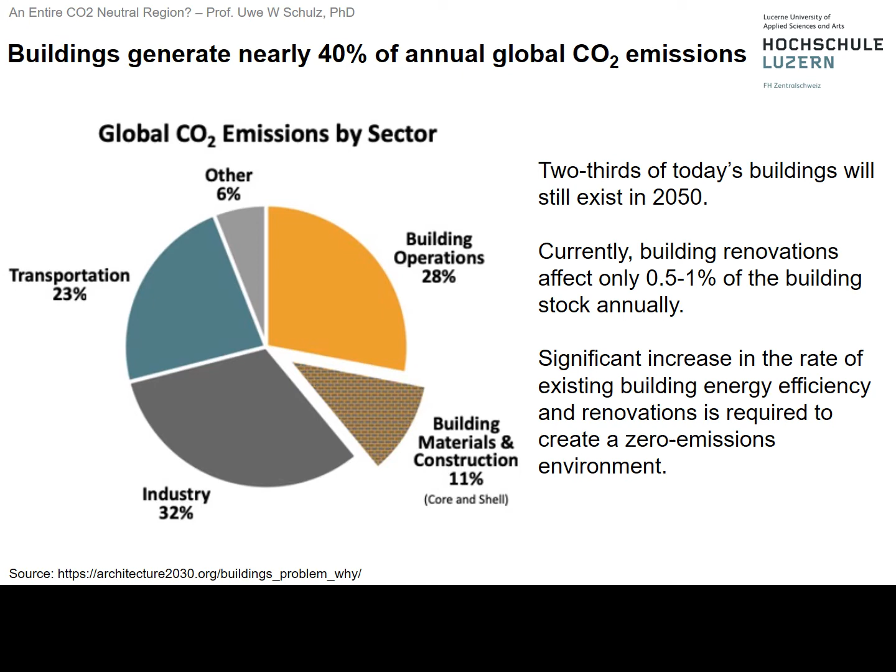Looking at specific Swiss buildings, today we in Switzerland are importing roughly 325 petajoule annually, just for the Swiss building stock. We do already have 71 petajoule per year of renewable energy, and the two together lead to 25 million tons of CO2 emissions. Our objective is to have CO2 reductions by a factor of 3,

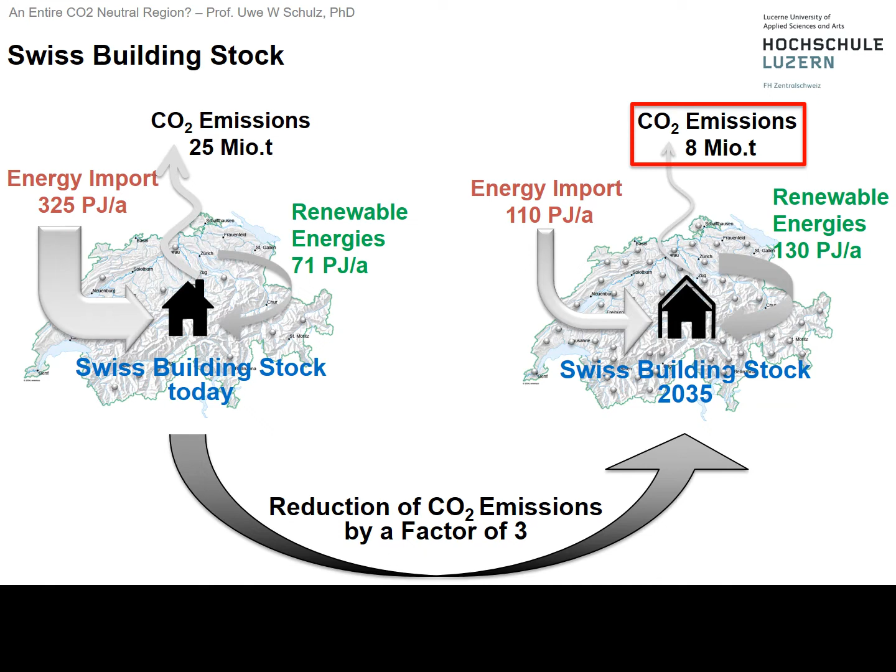which would then mean the energy import is being reduced to 110, while the renewable energy portion is increased to 130, then generating CO2 emissions of only 8 million tons, which is only about a third of what's happening today. Therefore, we are addressing existing buildings in a two-step approach.

First, reducing the energy demand, which can be accomplished by renovating buildings and respectively the envelopes, keeping the warmth inside the building, while for new buildings we apply higher standards. For the use of energy, we are more conscious and change and adapt the processes. One example is the simple fact of boiling water.

Boiling water in a pan requires 3 times as much energy as boiling water in a tea kettle, just as one of the examples where the effect of water boiling is identical, just the use of energy has been reduced to 1/3. Whatever is left as a requirement for energy is to be done in an efficient way, applying new technology and

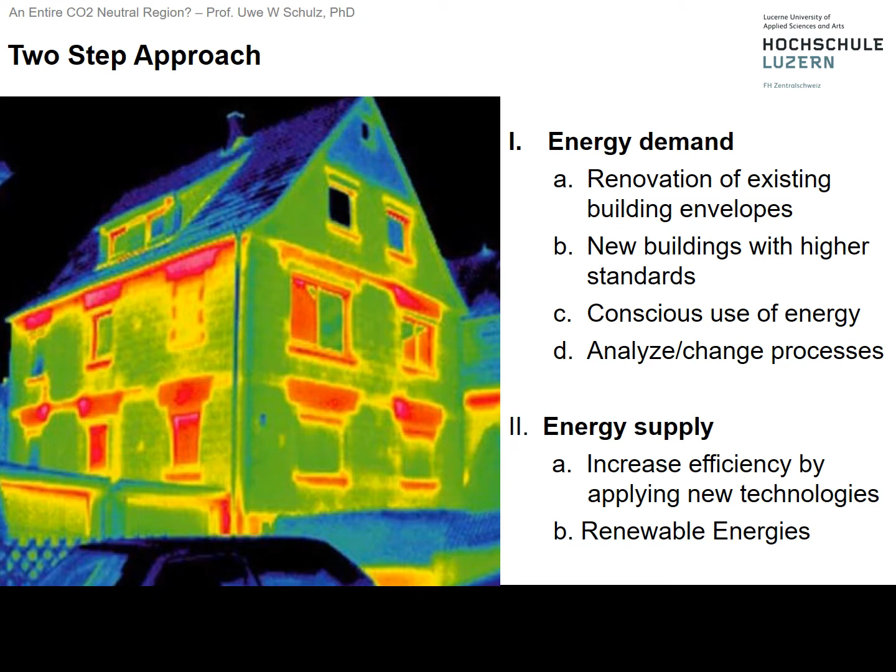building on renewable energy. Looking at the energy demand of Swiss residences, we can see that 2/3 is required for space heating. Obviously, this is partially because of the low winter temperatures, but in addition to that, we require almost 15% for heating of hot water, and then another 1.8% for heating, ventilation, air conditioning, making together the majority of the energy requirement in Swiss residences.

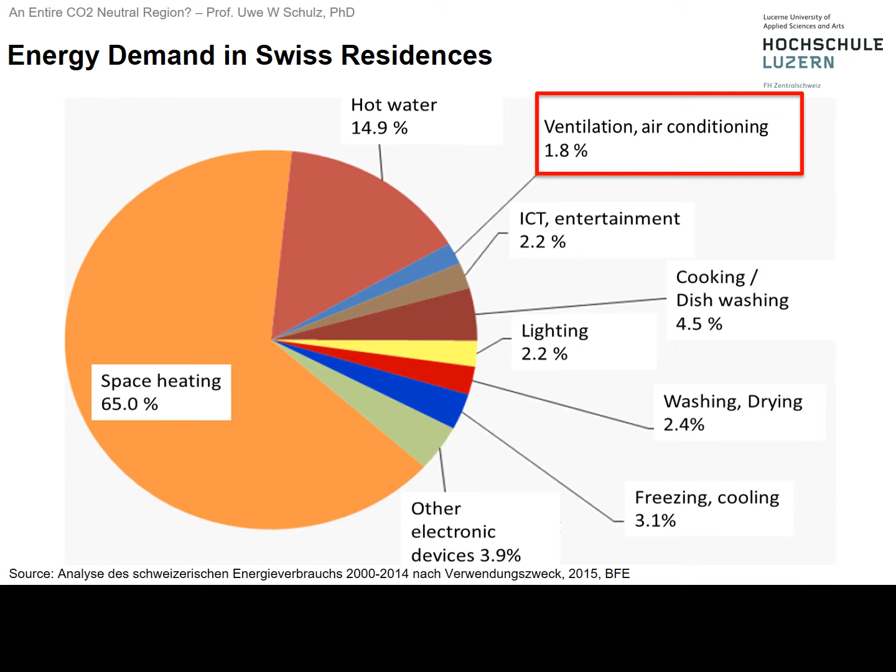A perfect way to reduce the energy demand of buildings and reduce the space heating requirement is to do an insulation, so a packaging of the building. Now, given that the buildings in Zernez are very pretty and therefore Homeland protected, one cannot do an insulation from the outside. So therefore, it needs to be done from the inside, as can be seen on the right-hand side, to have a similar effect.

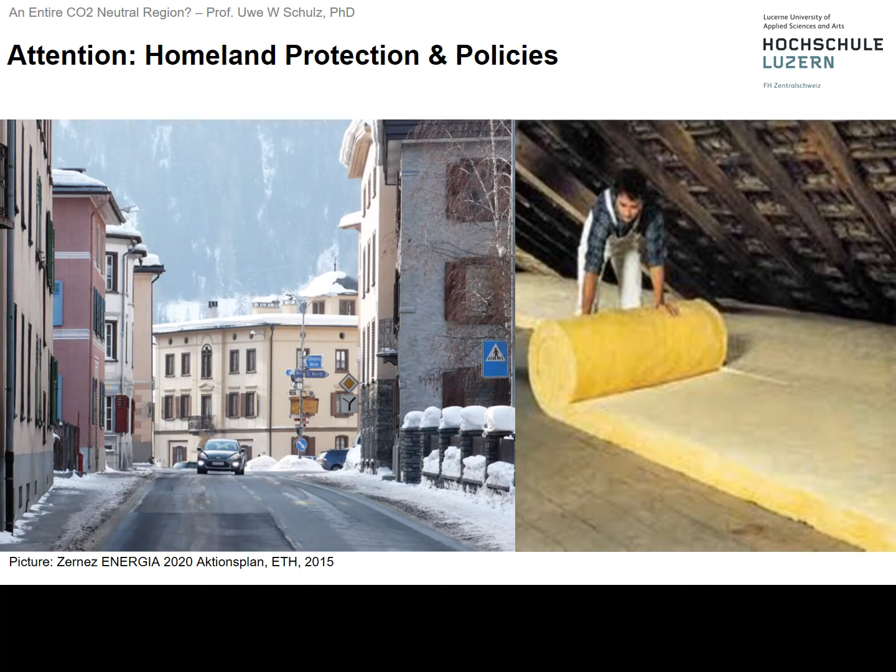While not as efficient, it may take a little more material, but it satisfies both the energy requirement and the homeland protection and policies. So moving to the energy supply, one technology everyone has been talking about is wind power. Now, wind power not only requires certain winds, but it also requires the acceptance of the inhabitants, which in the case of Zernez is not an option. So therefore, wind power is not part of this simulation.

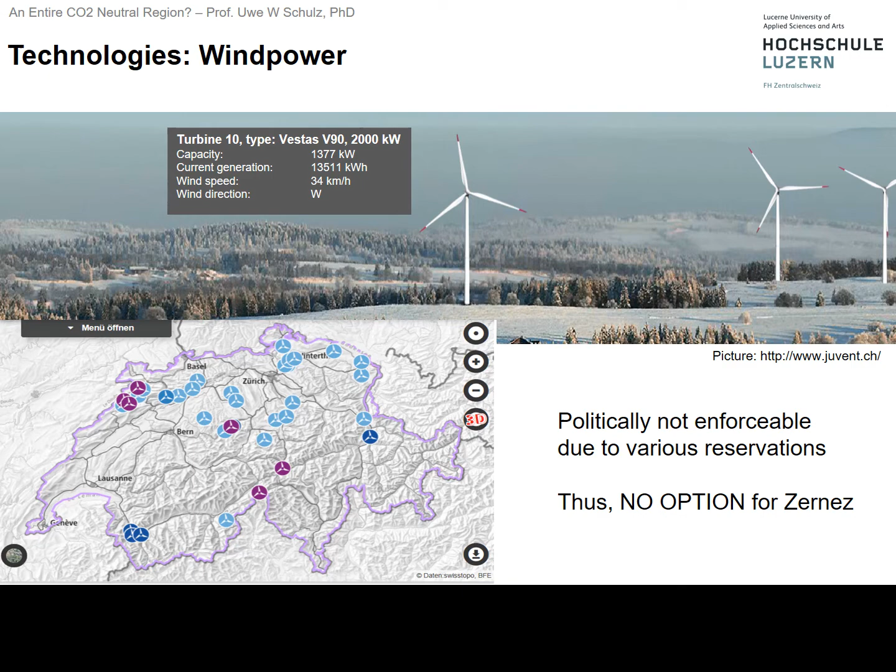Solar energy is the most obvious source of renewable energy. The sun is shining around the world more or less intensely. Looking at selected areas like the UAE on the lower left-hand side, we can see that the horizontal irradiation reaches levels of 2,500 kilowatt hours per square meter. In Switzerland, just like in Japan, the level is around 1300 to 1400 kilowatt hours per square meter and year.

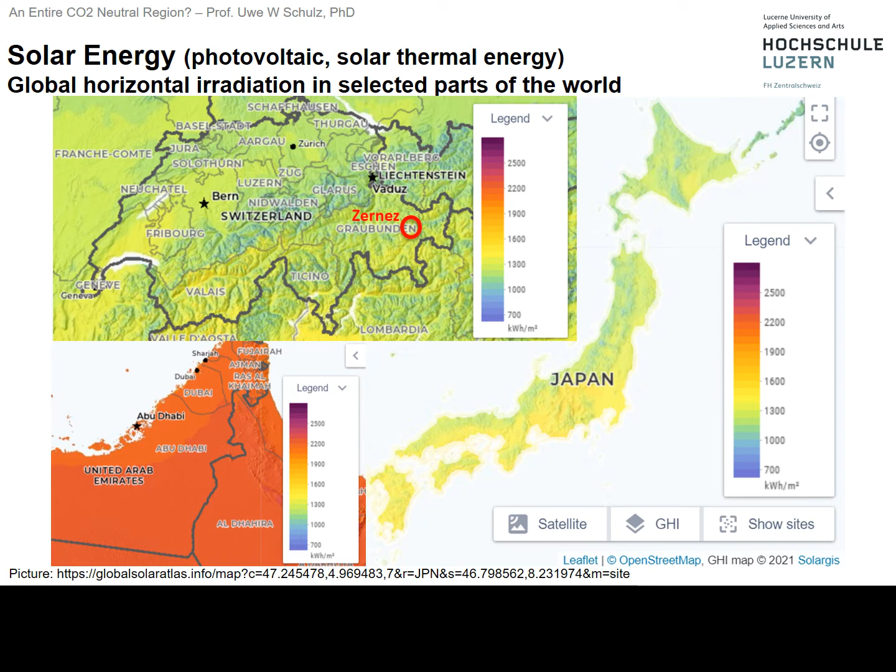One effective way to heat a building is using and applying heat pump technology. Heat pumps work like refrigerators. They cool one side and heat another side. So like in the refrigerator, we all know that when we touch the back of it, we have a heat exchanger which is warm. So this concept is being applied to buildings whereby heat is extracted from the ground or any other source of low temperature heat.

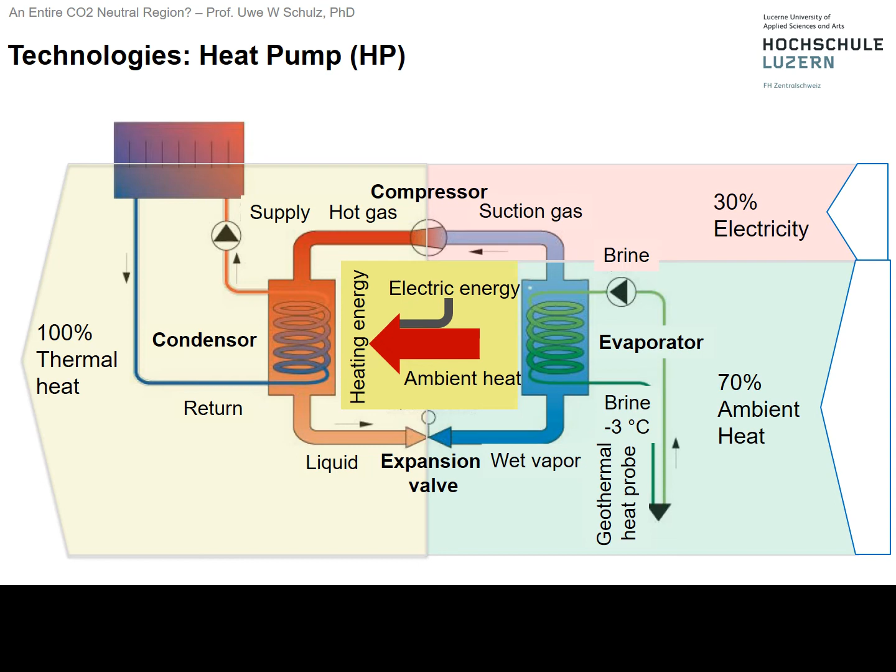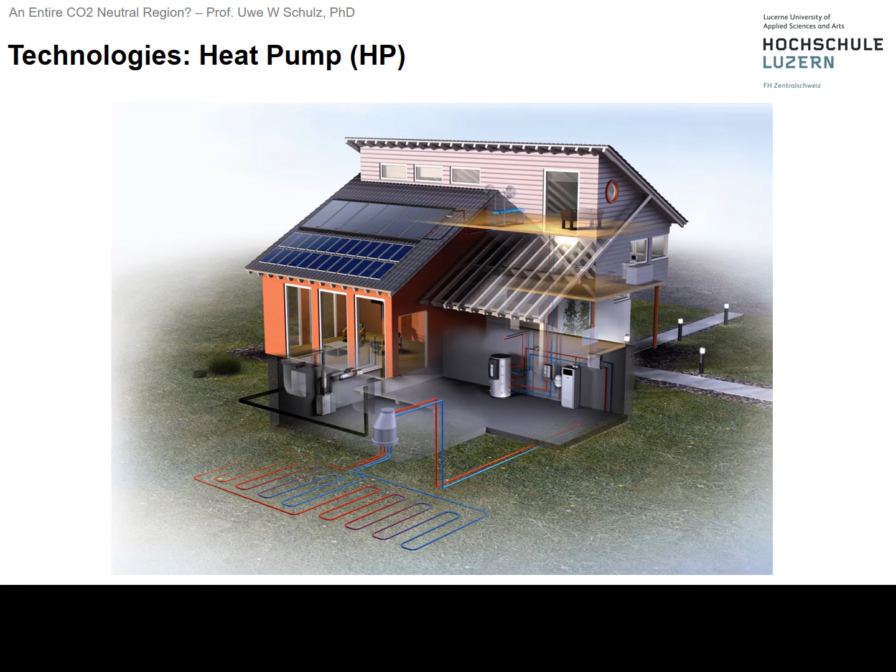Then compressor electricity is being added, and then the heat is pumped, as the name says, to a higher temperature level and then supplied to the building, which in case of the refrigerator is the backside of it. In this graph we can see how the heat exchanger is being put into the ground to absorb heat, and then how it is distributed through the building for heating purposes and hot water.

Now, here we see the challenge. We can have photovoltaic on the roof, maybe even a windmill somewhere. We need to worry about hot water, and all inside the building, where we know that it's a challenge to only use heat when the sun is shining. If we could pool multiple buildings together, we have a better chance to avoid simultaneous requirements.

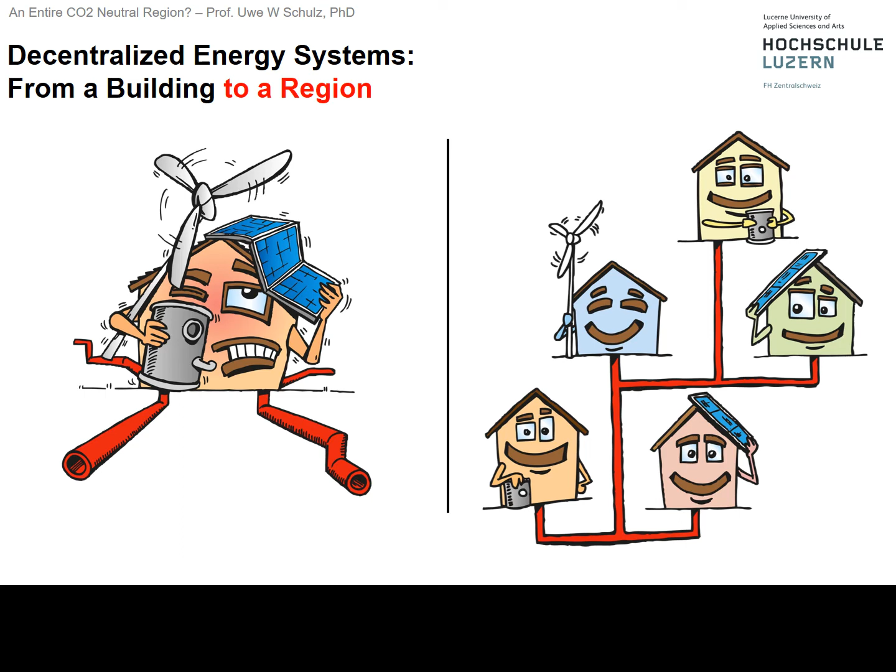For example, it is unlikely that everybody is taking a shower exactly at the same time or making dinner or lunch at the same time, while then maybe energy storage can be a good option and is therefore favoring a decentralized energy system. The district heating system includes a biomass wood chip heating plant.

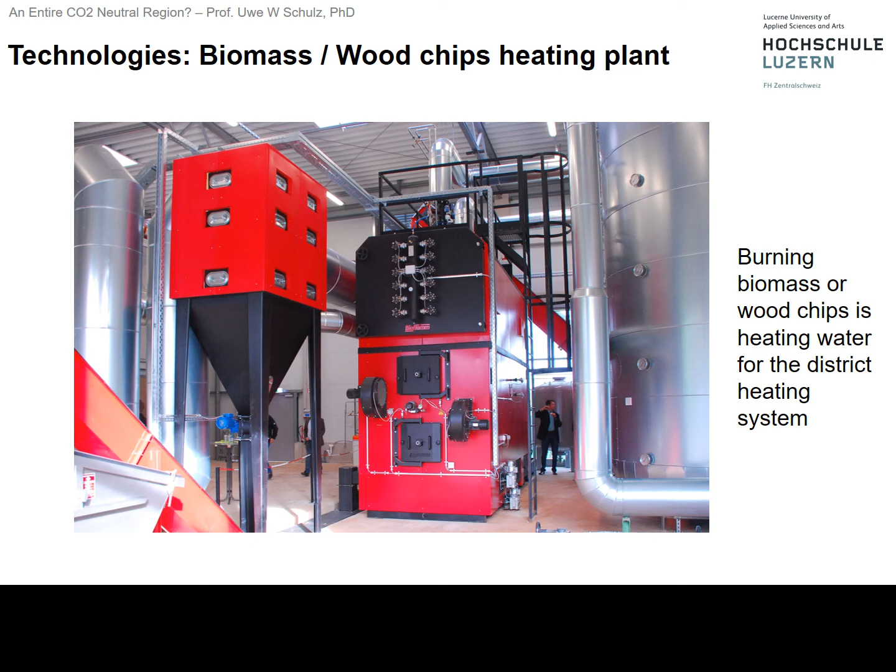In this plant, the biomass is burned effectively and efficiently, heating water to be circulated for the heating system. The remaining exhaust air is then effectively filtered to not harm the environment at all. So hot water is circulated through the district heating pipes, which are put into the ground sufficiently deep to not cause any freezing during non-operation. At the same time, they are insulated to minimize heat losses.

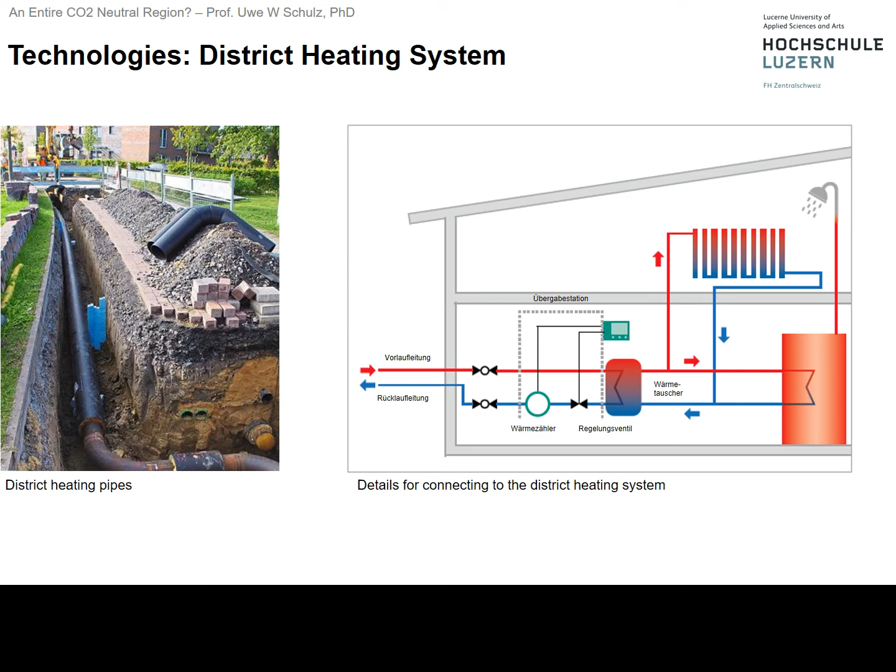When the water gets to the individual houses, there is a transfer to a separate loop, which is circulating water inside the building, providing heat in the rooms through radiators, and providing hot tap water also generated by this district heating system. In a cogeneration heating power plant, the burning wood chips, for example, are first heating the return water, which is then being warmed up further in the final heat exchanger.

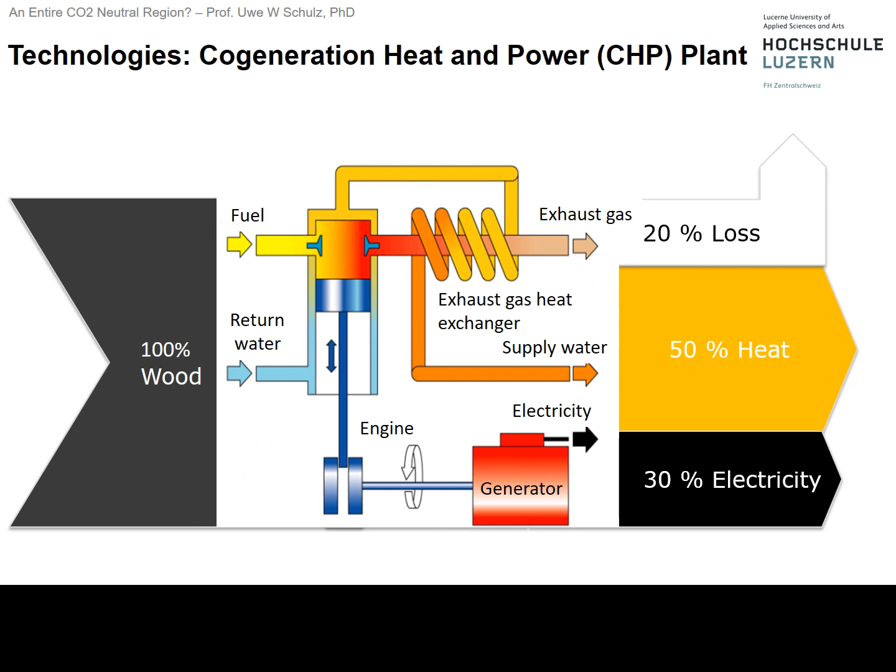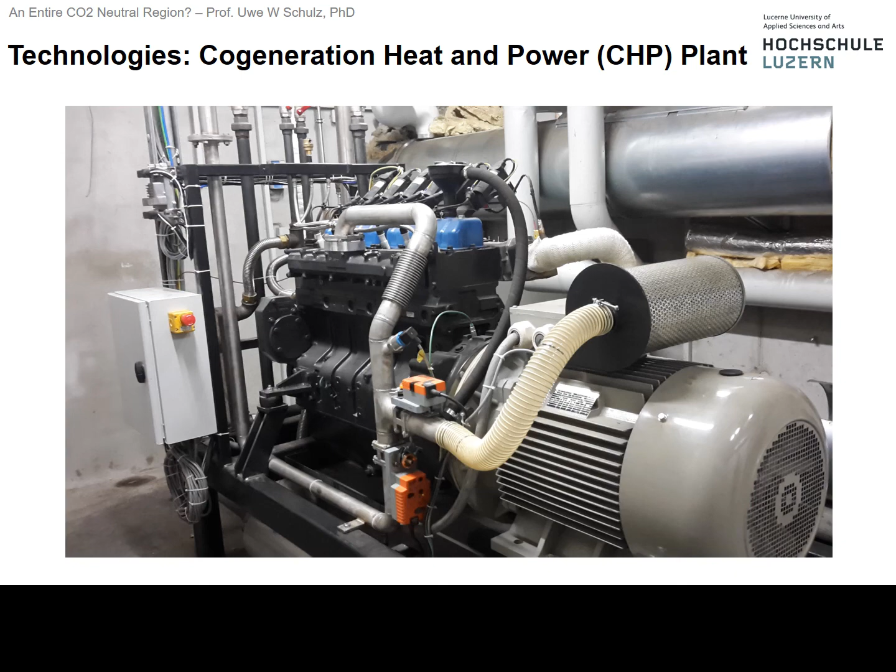At the same time, in the burning cells, pistons are operated to drive a generator. Thereby, the overall energy balance looks at 30% of the input energy exiting as electricity and 50% as heat, making it quite an efficient system. It mentions a piston. It is evident that the equipment itself looks like an engine, which in turn it is, and which you can see in the foreground, a generator, which is a very effective way to provide electricity to the system.